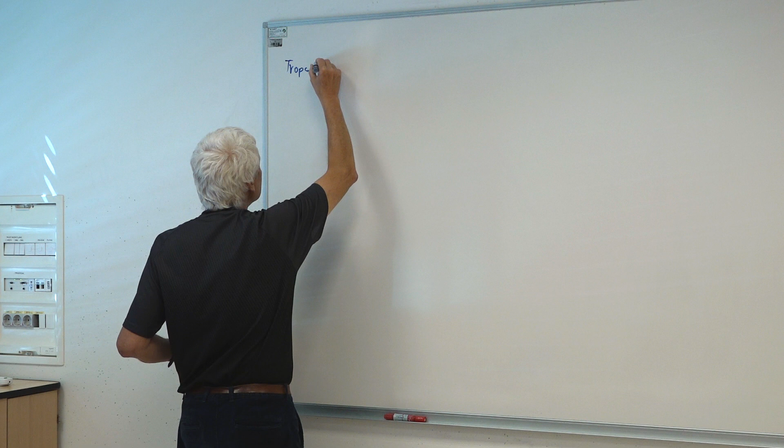Now it seems that climbing up in the atmosphere, the pressure is decreasing. Gases become very rarefied as you climb up. There are no clouds, no water vapor, no water drops beyond, say, 10 or 15 kilometers. In the stratosphere, there are no clouds. What happens as we go up?

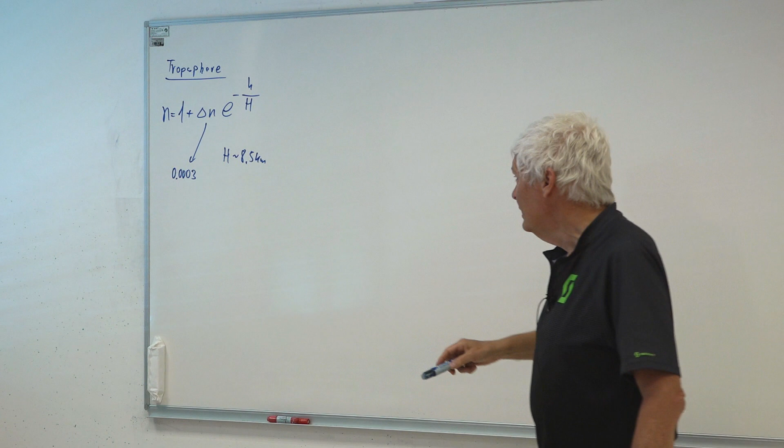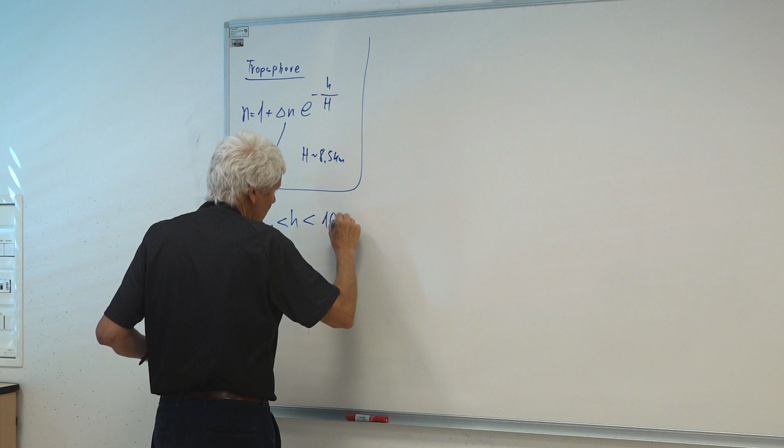Since there is no material, no gases, no water drops or ice crystals, there is no change of the refraction index. But what happens at altitudes above, say, 60 kilometers, and say less than approximately 1,000 kilometers, though there is no exact limit to this, we get into the ionosphere.

So particles here may be molecules, may be just single atoms, may be ionized atoms, having one electron more or less. They may also be free electrons in the ionosphere. So I may have charged particles here.

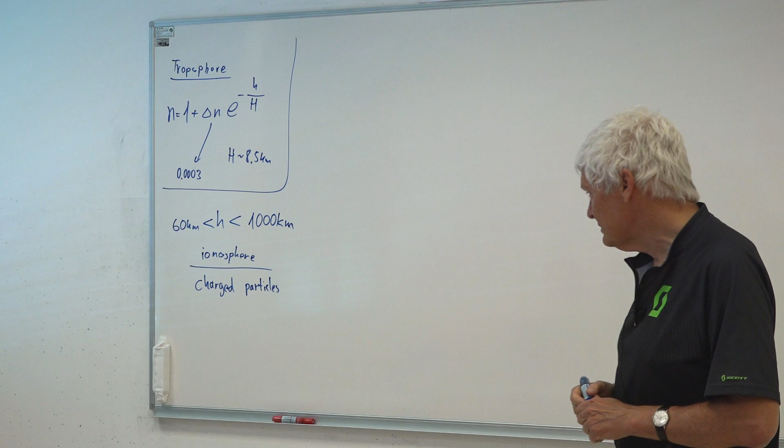And what happens with charged particles? If I have an electric field, these particles start moving. So if I have a particle that has a charge Q multiplied by the electric field, this gives me a force, a certain electrostatic force. And this force is now equal to the mass of the particle times the acceleration.

And this is equal to mass times acceleration, which is the derivative of v over time. Or written for harmonic fields, this is j omega for the derivation, mass times v.

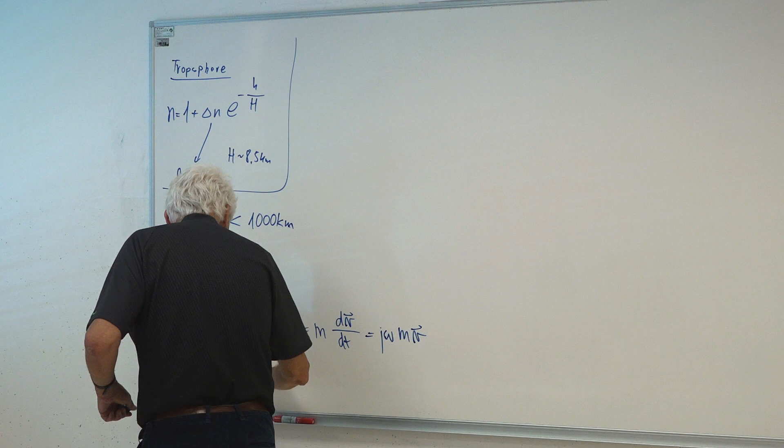This is now the velocity of our particle. I can derive the velocity of this particle out of the equations when I know the charge of the particle, I know the mass of the particle, and I know the electric field applied. So now the velocity v is equal to what? It's equal to charge over j omega mass, charge and mass being properties of the particle, times the electric field.

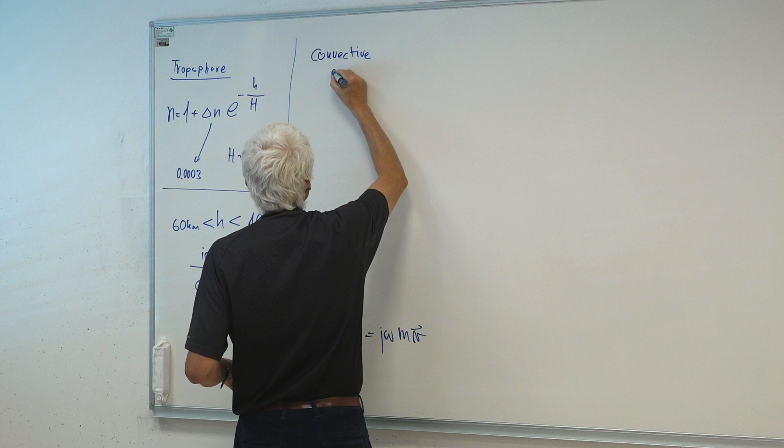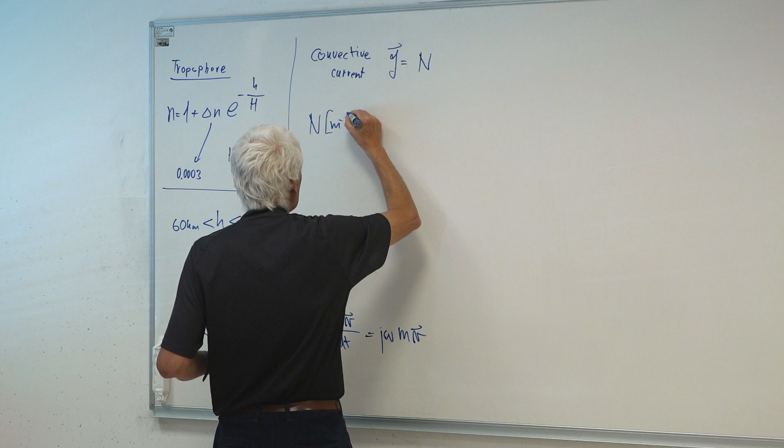So particles start moving. What do these particles do? They produce a convective current. And this convective current is equal to what? This convective current J is now equal to the density of the particles n, where n has units per cubic meter, times the charge of the single particle, times its velocity.

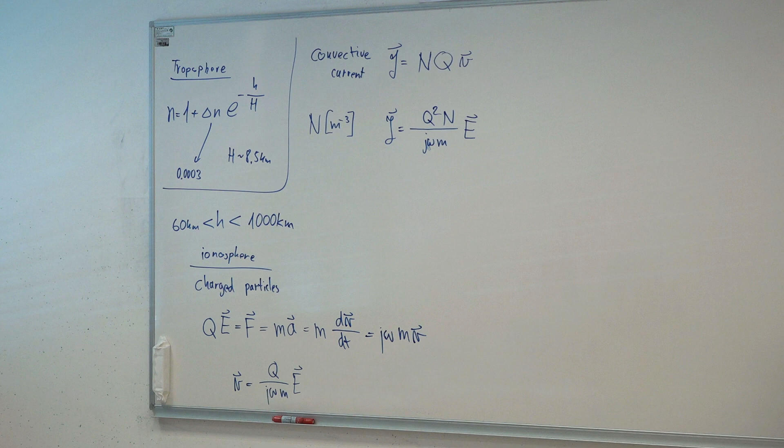So if I now combine the equations, plugging in this velocity of the particle, the convective current now is equal to Q, and Q is Q squared, N, over J omega mass, times electric field. So I have a current, the convective current, that is proportional to the electric field, with some constant here in the calculation.

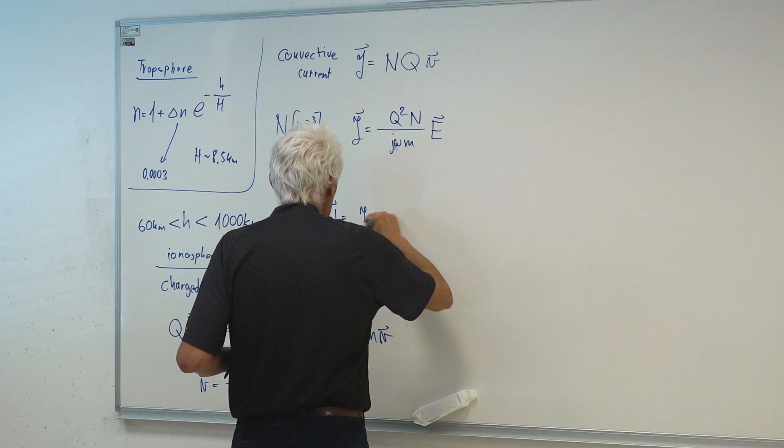So if I write the Ampere law, curl of H, or I can write curl with the cross product using nabla times H, this is now equal to what? What is this convective current? This is this one here, plus the displacement current, and the displacement current is J omega times epsilon 0 times E, since it's almost vacuum.

What is now the effect of this current? I can rewrite this thing once again, having both terms assembled. So let's write it as J omega epsilon 0 times... this counts for 1.

But since I miss here J omega epsilon 0, I have to add J omega epsilon in the denominator. So J times J gives a minus sign, and in the denominator now I have omega squared epsilon 0 mass. In the numerator I have Q squared N, and all this is times the electric field, the applied electric field. Let me check this again: J times J gives minus 1, omega epsilon 0, omega squared mass.

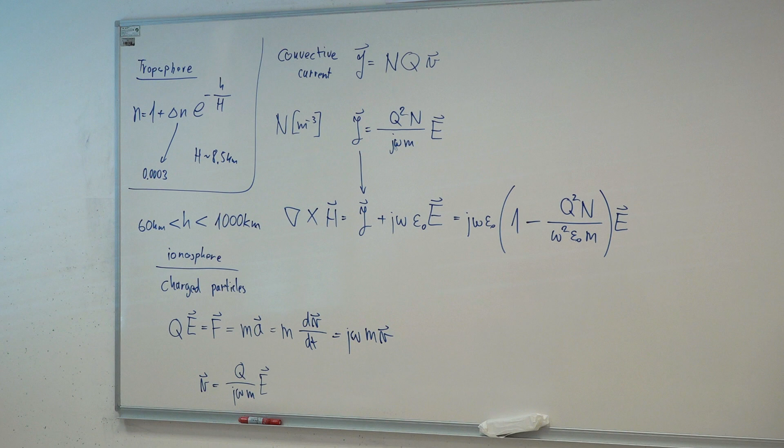So I can now say that the actual permittivity is different, that I have a relative permittivity, and the relative permittivity is this bracket here. So this is epsilon relative, the relative permittivity of space.

This is now the square... not yet, there will be a square root, but not yet, I was too fast. It is 1 minus Q squared, charge of the particle squared, density of the particles per cubic meter, frequency omega squared, epsilon 0, mass of the particle.

What is interesting here is that this relative permittivity is actually less than 1. Already this is interesting, but it actually does happen. It does happen that it's less than 1.

And also the refractive index of the ionosphere now is the square root of the relative permittivity, which is the square root of 1 minus Q squared N over omega squared epsilon 0 mass.

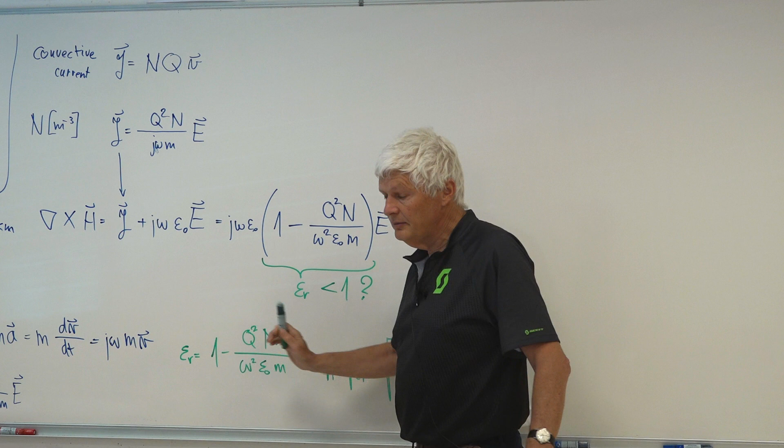Now you see that strange things may happen here. Epsilon relative, the relative permittivity, may get negative. It may happen negative at very low frequencies, where this fraction becomes large, and 1 minus something large may get negative. Also, the refraction index may get imaginary. An imaginary refraction index means no propagation.

So now it makes sense to actually simplify the quantities using this equation, because we are going to use them much in this hour. We want to simplify these quantities and find a new description for them. So I would rewrite this equation.

So 1 minus, for the relative permittivity, 1 minus q squared n over omega squared epsilon 0 mass. I would prefer to rewrite this as 1 minus plasma frequency squared over frequency squared, where the plasma frequency is the square root of q squared n over epsilon 0 mass.

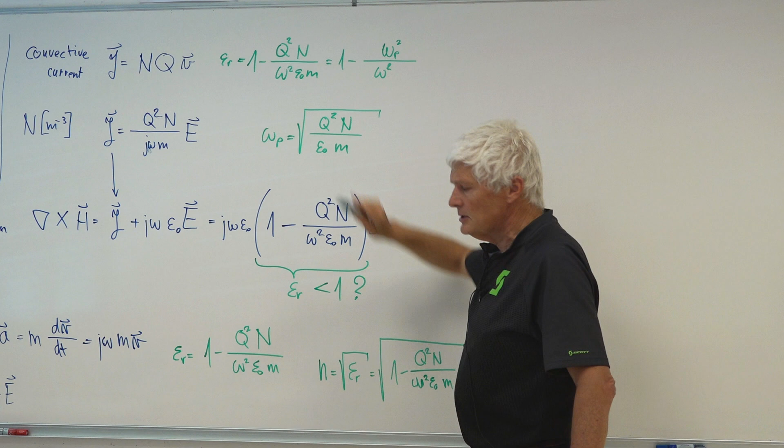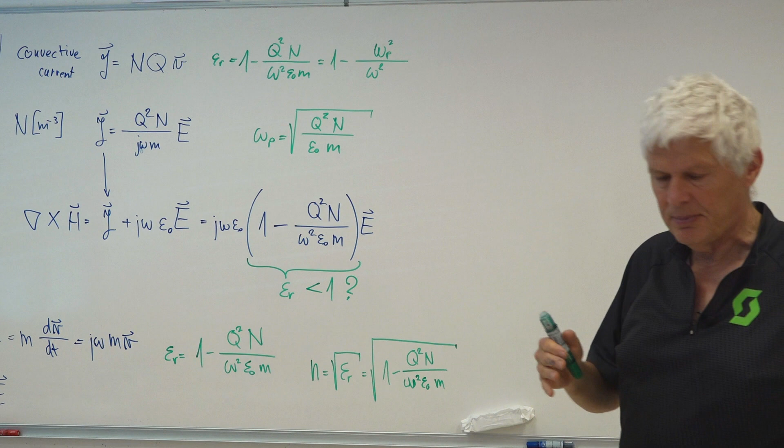But something I should point out here immediately: that electrons in the ionosphere, I also have free electrons. Free electrons have a very small mass compared to all other particles. Electrons are about 2,000 times lighter than protons, the next larger particle, the next heavier particle. So it makes sense to only consider electrons here.

So I have here the charge of an electron squared, the density of electrons, epsilon 0, and the mass of the electron here. Because the mass of the electron, as I said, is approximately the mass of the proton, the next heavier particle, divided by 2000. So electrons are much lighter than protons, so they are going to have far the largest contribution to the convective current, given by the electrons.

In fact, what I'm actually interested in, I'm not interested in the whole ionosphere, I'm interested in the so-called electronosphere. Just how many electrons do I have in the ionosphere?

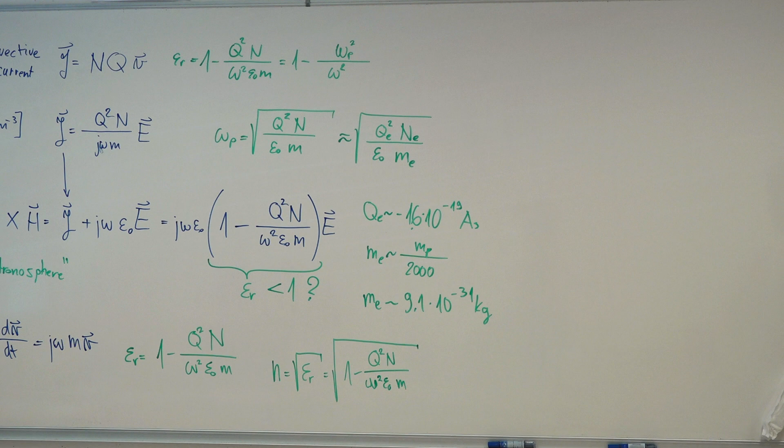And I know what the quantities are now. The mass of the electron is approximately 9.1 times 10 to the minus 31 kilograms, and the charge of an electron is minus 1.6 times 10 to the minus 19 amp seconds. This exact value here is also the definition of the ampere unit of measurement. So I know these figures, I know what epsilon 0 is. I only need to know the concentration of the electrons.

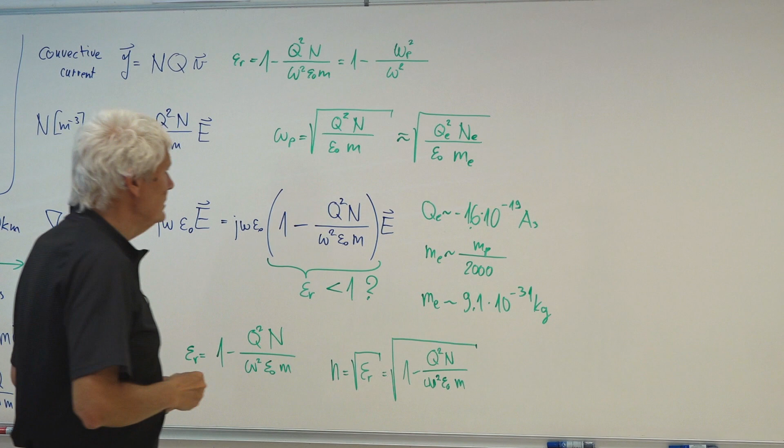How many electrons are out there in free space? To see where these effects take place, where does this omega p take place, I also use conventional frequencies. So frequently I write the plasma frequencies, I write this ratio with conventional frequency as 1 minus frequency, plasma frequency divided by frequency squared, where I just divide by 2 pi up and down.

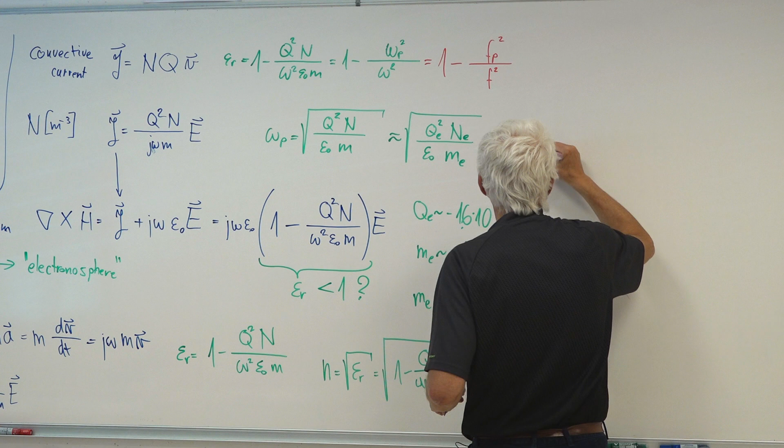So the plasma frequency is now approximately, for electrons only: I have 2 pi in front, 2 pi squared in the denominator, epsilon 0, mass of an electron; up I have q of an electron squared, concentration of electrons per cubic meter. How many free electrons per cubic meter do I have?

And the altitudes when this happens, and the densities of electrons are very small over there.

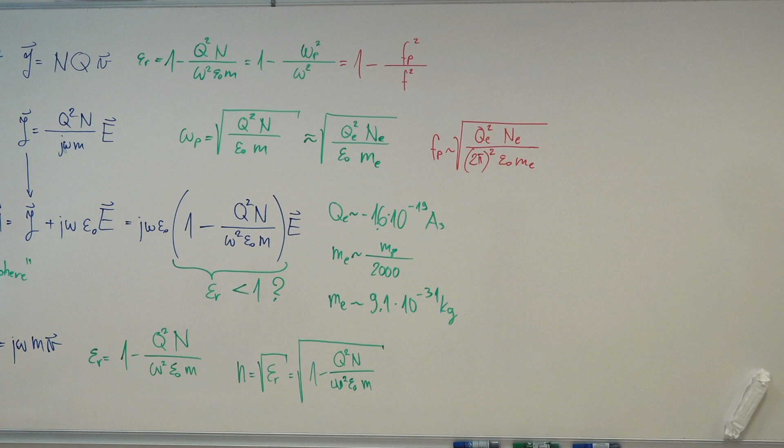So if I try to make a drawing: I start at 10 to the 9th power, 10 to the 10th power, 10 to the 11th power, 10 to the 12th power. This is concentration of electrons per cubic meter, meters to the minus 3. And if I draw here altitude: 100, 200, 300, 400, 500, 600. Altitude in kilometers.

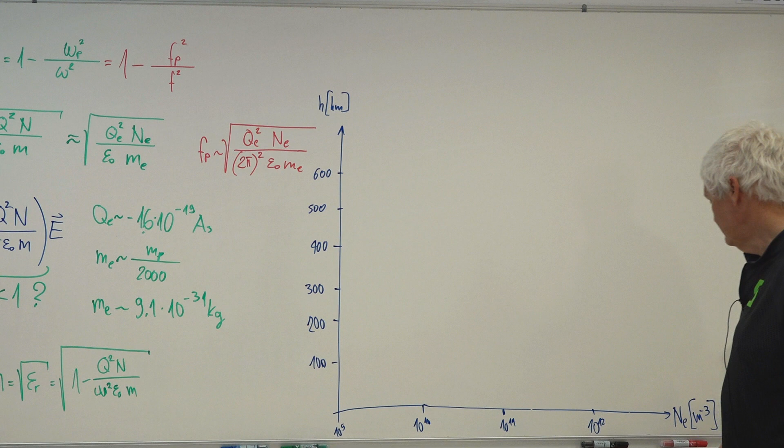Where do these things happen? Very little happens at low altitudes, because below 100 kilometers the air density is still significant. There are many collisions of these charged particles, and recombination of charged particles, plus and minus ions recombine. So I may have some very weak peak here, a much stronger peak here, but the strongest things happen up here during daylight.

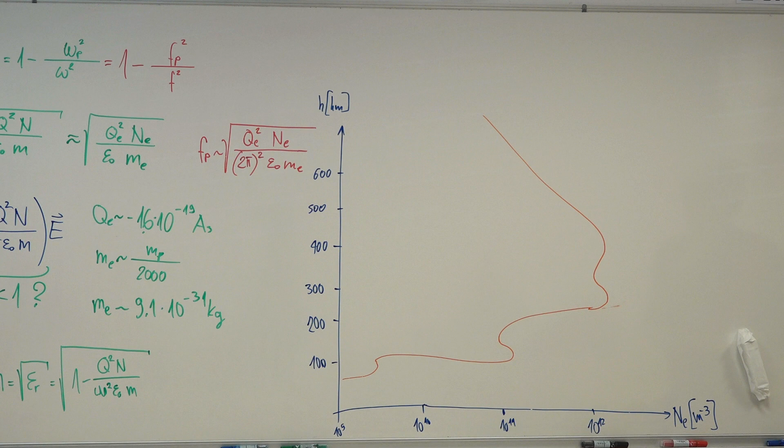These ionospheric layers, when physicists first described them: at perhaps 80 kilometers, layer D; at 120 kilometers, layer E. Then I have layer F1 at 250 kilometers, and another maximum at layer F2, around 400 kilometers.

What does this mean in practice? It means that the International Space Station is flying over here. So if I draw it, the International Space Station is flying at around 350 kilometers.

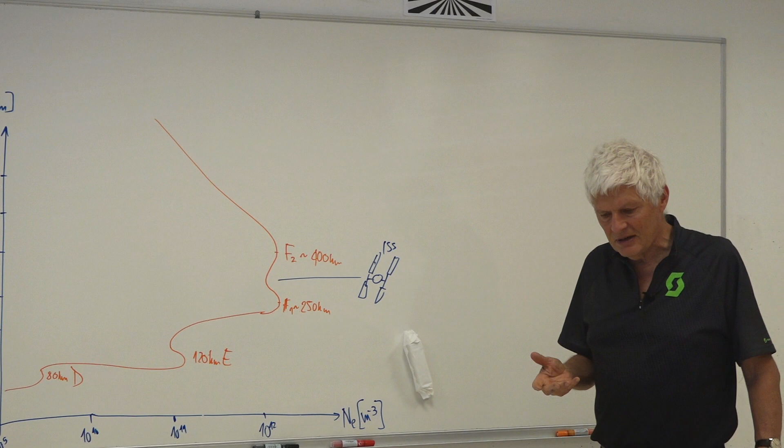For any practical reasons, these altitudes are, for us simple observers, complete vacuum. But they are not that good a vacuum. These 10 to the 12 electrons per cubic meter mean that the International Space Station is flying in an acid - though rarefied, this is an acid, a plasma made of electrons. Acids work in this way, forming free electrons.

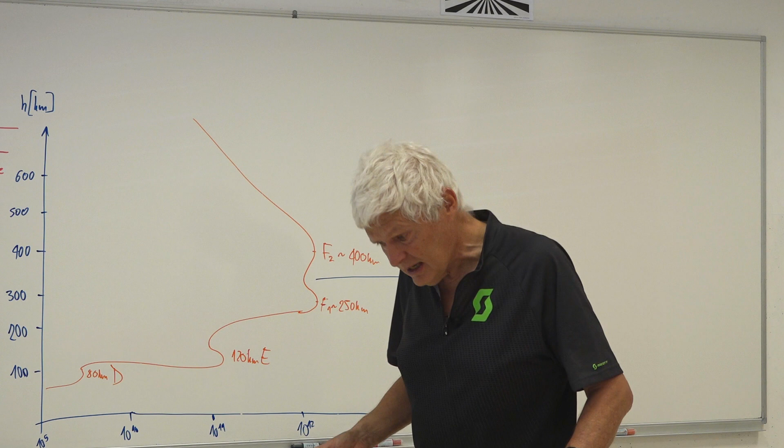And this is acid. You have to be very careful what kind of metals you build your space station from, so that it doesn't get eaten off by the acid it's flying in. Though this acid is very rarefied, observations on the space shuttle were that the nose, the tip flying into this acid, was actually eaten about 1 millimeter per week. This is an acid.

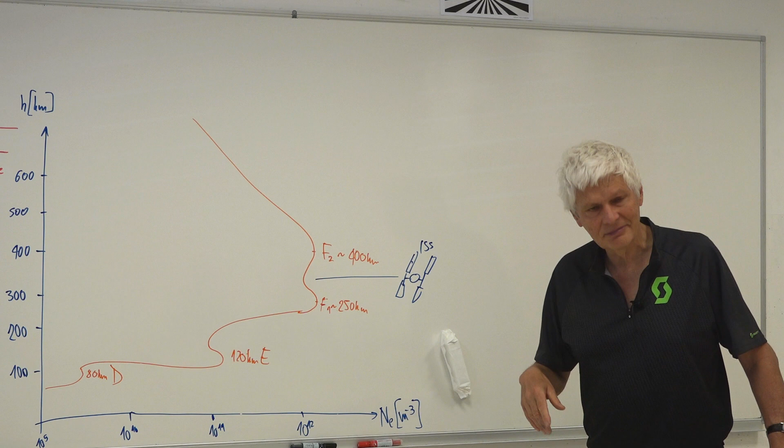It's not vacuum. Further, when we go further up in space, there is much less air available, so this is a very rarefied atmosphere. And this was during the day. During the night, things go a little bit different.

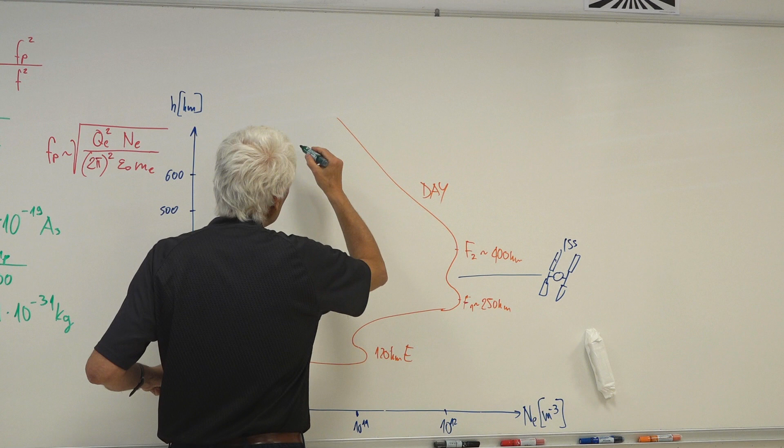During night, the maximum concentration is somewhere lower, and these lower layers disappear altogether. So lower layers at night are gone completely. And these two layers, F1 and F2, join in a single layer F at around 300 kilometers at night.

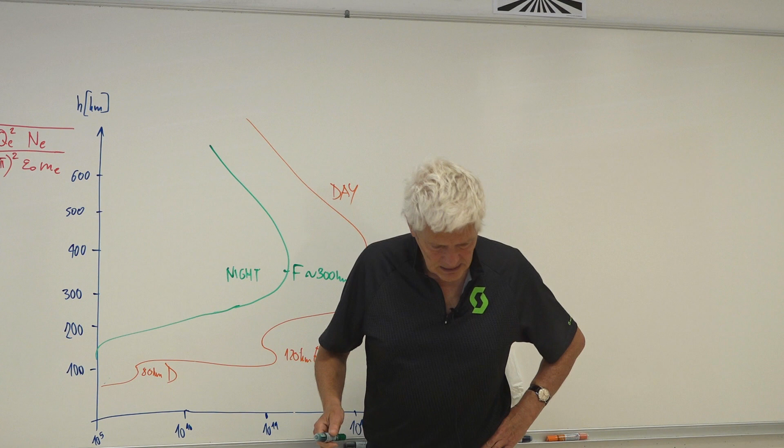Because all these layers are caused by short waves, say UV, X-ray radiation from the sun. At night when the sun is gone, we are in the Earth's shadow, but some electrons do stay here. Especially the recombination time of electrons in the higher layers is very long, because here the atmosphere is very rarefied. While lower layers, where you have lots of collisions with neutral particles and other ions, are gone completely at night.

So this is our actual situation of the ionosphere. What can we count now on this ionosphere? At night, the concentration of electrons in the F layer is about 10 times smaller than the concentration during day. So during day, we have a plasma frequency of, say, around 12 megahertz.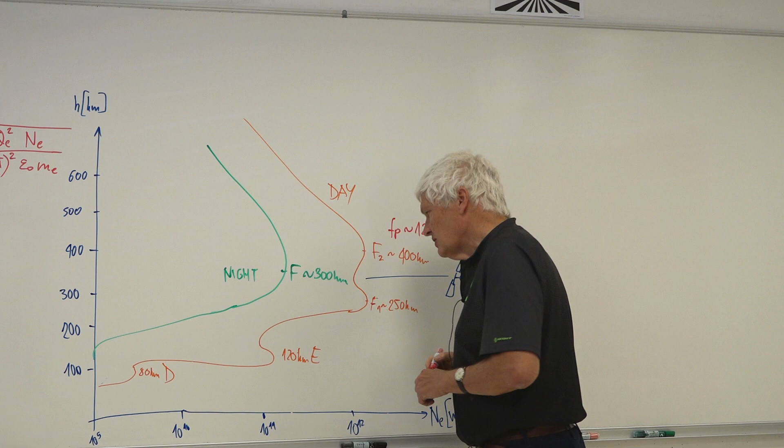But this changes very much with solar activity. Now it's very high, with the high solar activity and lots of solar flares we have right now. And since the concentration changes 10 times, the result during night is perhaps a maximum F plasma value of around 4 megahertz.

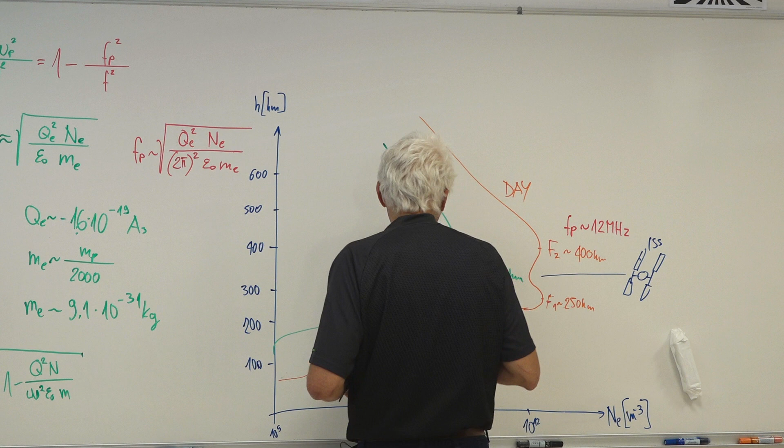Now we know the frequencies where we can expect some effect from the ionosphere. From the ionosphere in the higher layers, in the F layer or the two F layers, we mainly have refraction, because we actually change the refraction index here. We do have refraction in the higher layers.

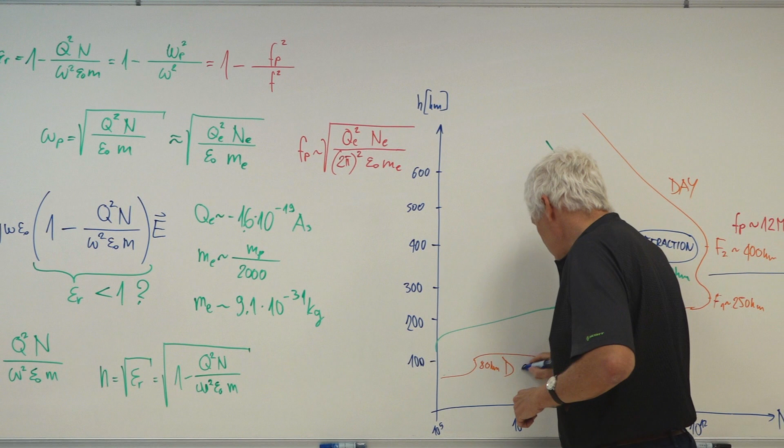While in the lower layers, we have collisions. When the particle collides with other particles, it transfers its momentum to them, therefore it loses energy - so here we have additional signal loss. These regions are lossy: low regions introduce loss, while high regions in the ionosphere introduce refraction.

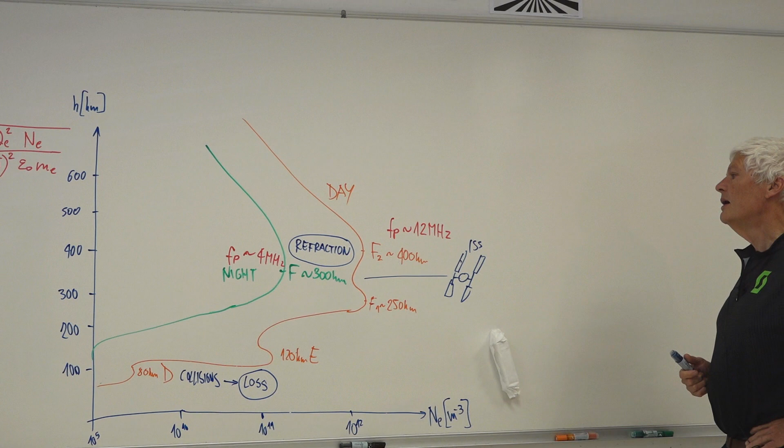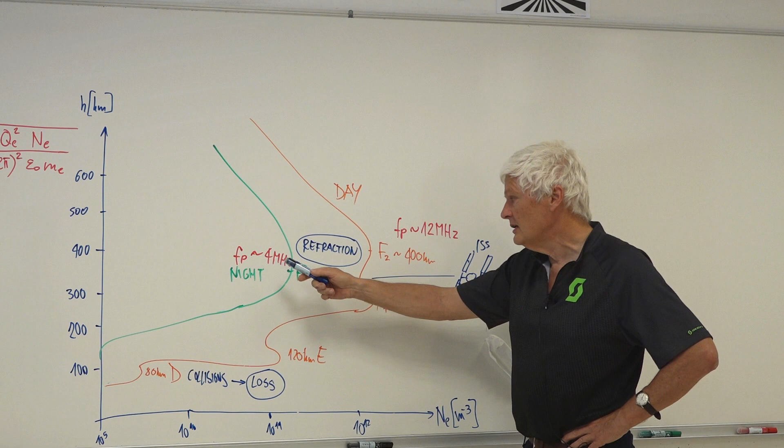So these frequencies are known - maybe 4 megahertz for normal solar activity, depending on whether the sun is behind it, generating all these charged particles. During day it's 12 megahertz, during night 4 megahertz. This figure may go quite up with an active sun with lots of solar flares, so it's not some fixed figure I can draw on the board - it's something that's changing all the time.

How can we use these things for radio communication? We usually don't like loss, signal attenuation - we don't like to talk about that, but even that plays a role.

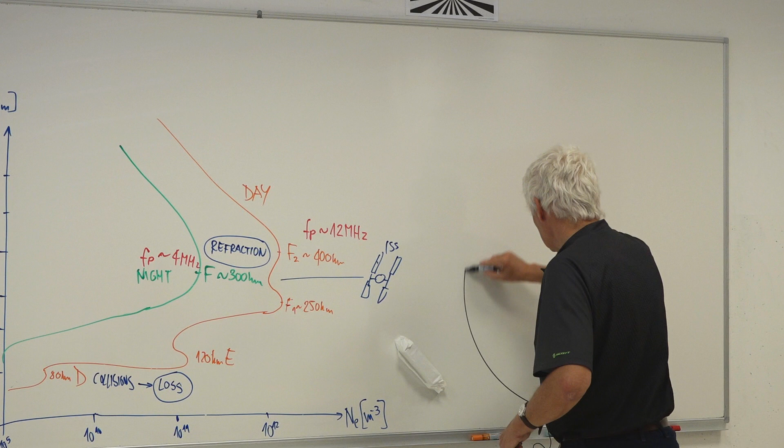We want to establish long-range radio contacts. Say we have our Earth here, and here is the center of the Earth - this is the radius of the Earth. And at a certain height, I have the ionosphere, say around 300 kilometers, just to give you an idea. And up here, I have the ionosphere.

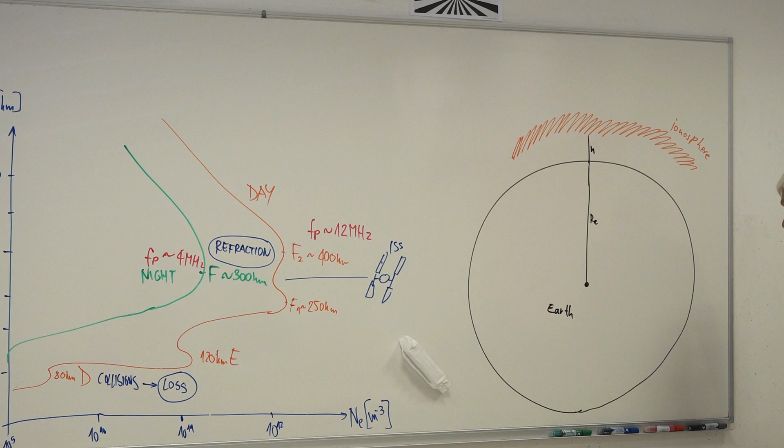The ionosphere does not have a strict limit where it changes. It goes all the way up into free space, but it's less dense at higher altitudes. So these lower altitudes are perhaps the most interesting for us.

So what I can think of is a radio link that originates from this station, goes straight to the ionosphere. There is almost no refraction here. Then in the ionosphere, I have refraction, and I can go back down to the ground to this station here.

So I transmit to the horizon, and also here I transmit to the horizon. This is the radius of the Earth, and this is also the radius of the Earth. What is now this distance covered? Distance here or distance here? They are identical. Here, in fact, with this refraction of the signal, I get total reflection.

I may get total reflection at some particular frequencies. What is now the geometry? How far can I get with this mechanism? Total reflection happens because the ray is bending back to the ground due to refraction, due to the changing refractive index of the ionosphere. What distance can I cover with this?

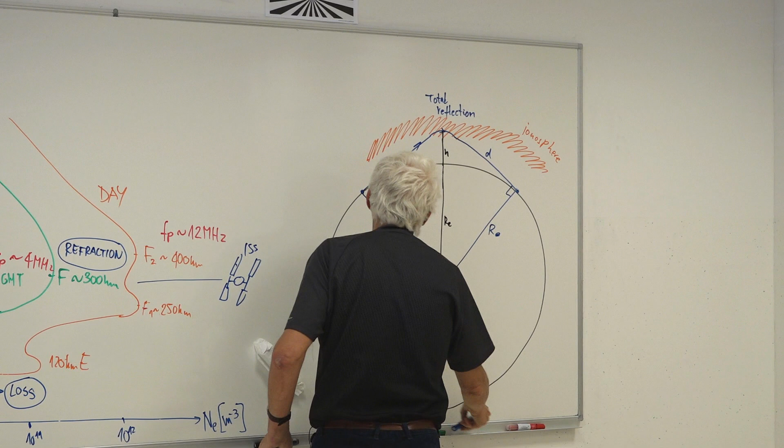So now, if I write down the equations of the triangle: r of the Earth plus h, squared, is equal, by the Pythagorean theorem, to d squared plus r of the Earth squared. But this term here is r of the Earth squared plus 2 times h times r of Earth plus h squared. So if I try to solve this equation, these two cancel out perfectly.

And just to simplify my life, I may neglect this term here. H squared is much smaller than twice h times r of the Earth, because h is in the range of 300 kilometers, and r of the Earth is 6,378 kilometers. So that term is quite small.

So my simplification now is that the distance covered in one hop over the ionosphere is the square root of 2 times h times the radius of the Earth.

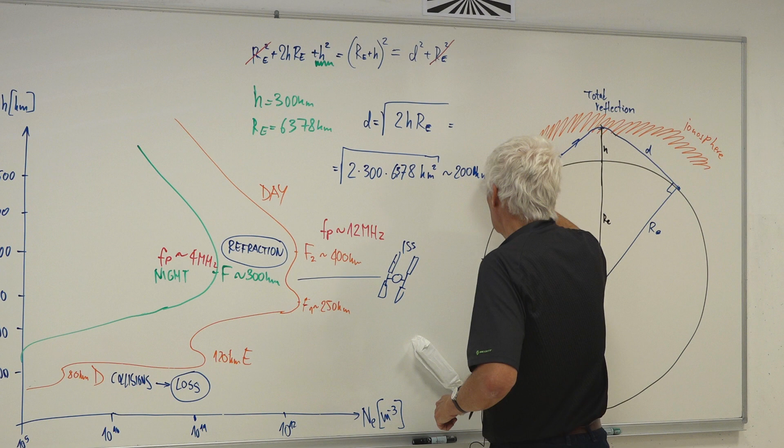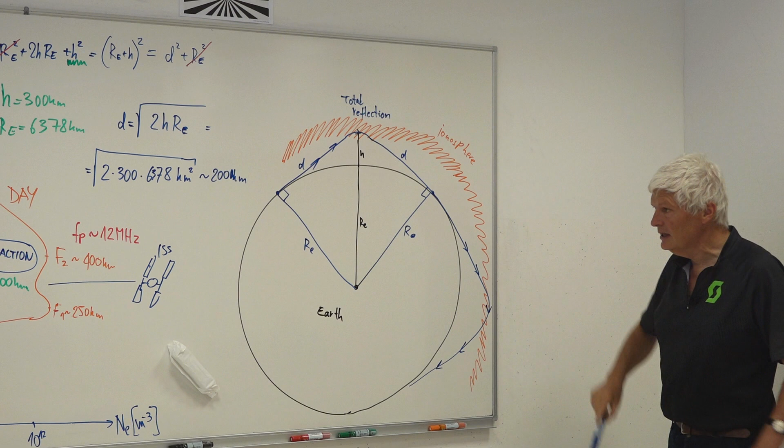So with 2,000 kilometers in one hop, I can make a journey of 4,000 kilometers. I may even have a reflection again off the surface of the Earth - one additional total reflection, refraction that turns into total reflection. So I have a reflection here, and then again total reflection here due to the refraction in the ionosphere. I can even get multiples of this distance, and practically reach the whole Earth if the ionosphere is in the correct condition to support this operation.

Up to which frequency can I go here? It depends on what n I need here - what the minimum n is required to support this operation.

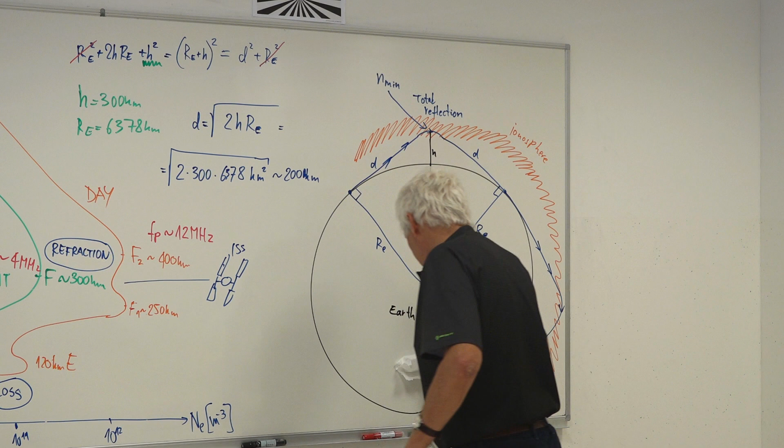And I can draw here the law of refraction, as if I had just total reflection on a simple boundary. So if I draw this, I have n over 1, and a ray coming in here. I want to have it horizontal, so here I have theta, and here I have pi over 2.

If I now rewrite the law of refraction, sine of the incident theta is equal to n. So I can calculate what n I need from sine theta. Where is theta? Theta is this angle here on this picture, so I see which quantities I have. I need sine theta - sine theta is now r of the Earth, this side here, divided by this side here, r of the Earth plus h.

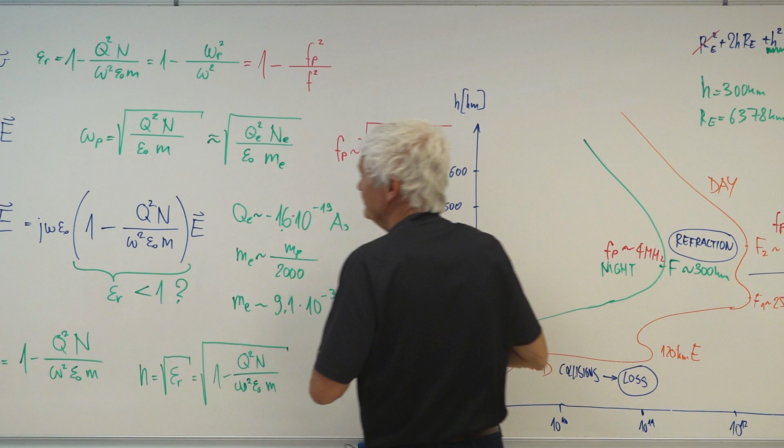This is the refractive index I can get here. I can get this refractive index only up to a particular frequency - beyond that frequency, I can no longer get it. So let me rewrite this now: refractive index. I should make some space on the board because I don't have any more space here.

So we were left here: our refractive index is now r of the Earth over r of the Earth plus h. And this is equal, on the other side, to the square root of 1 minus f plasma squared over f squared, frequency squared.

Now let's try to solve this equation. So I have to make a square. R Earth squared, R Earth plus h squared, is equal to 1 minus f plasma squared over f squared. If I pull this one to this side and revert the signs, I have r Earth plus h squared minus r Earth squared, divided by r Earth plus h squared, is equal to f plasma squared over f squared. On this side, simplifying on the other side, r Earth cancels out, so it's 2 times h times r Earth plus h squared divided by r Earth plus h squared.

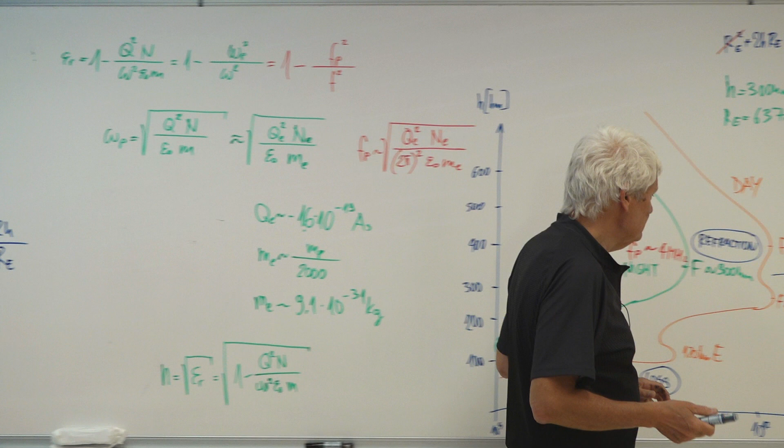So I can get up to frequencies, perhaps, here during the day, the maximum usable frequency may be in the range of 40 megahertz. Up to 40 megahertz I should be able to establish such connections as given here. It's not particularly high, and this should be during daylight. Also during night these things go lower, about 3 times lower. During night, the maximum usable frequency is perhaps just 13 megahertz. So it changes a lot from day to night.

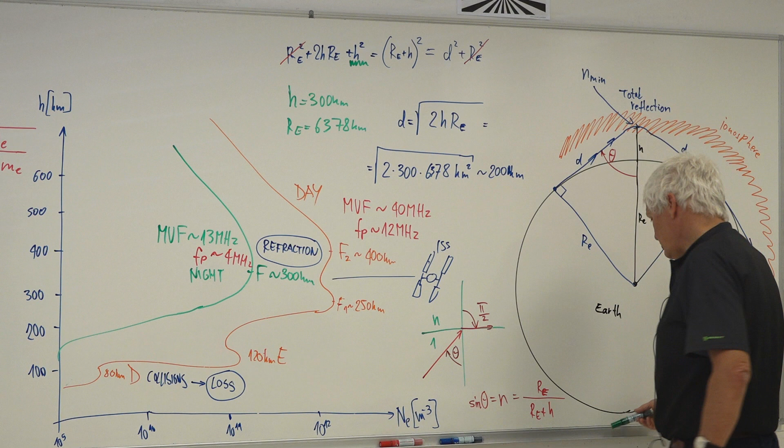Further, I should not forget that on the light side of the Earth, I also have the intermediate D and E layers, while this other layer was the F layer of the ionosphere, or both F layers up here. What does that mean? It means that I have loss here, and I have loss up here — signal loss due to attenuation. We didn't derive this today, but the attenuation in the ionosphere is inversely proportional to the frequency.

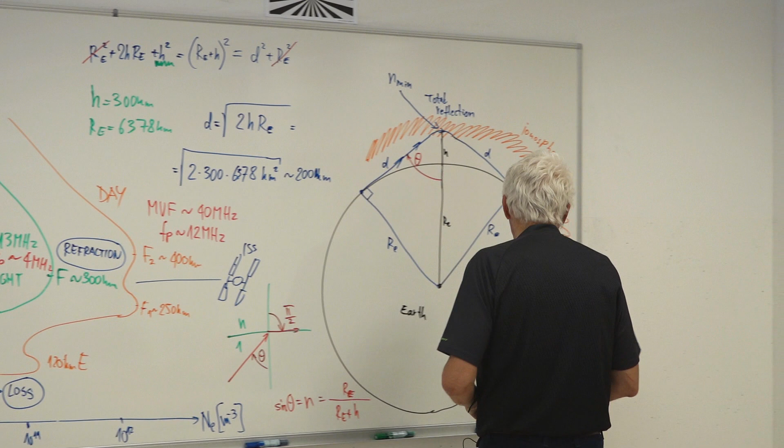We don't have time to do that derivation today. So what does that mean? This attenuation, this loss here, gives us a lowest usable frequency, due to attenuation during daylight, if the sun was shining from this side here. This was night, in the shade of the Earth. The sun coming from here illuminates this part, generating new electrons in the D and E layers all the time. This attenuation adds loss. LUF is not a fixed figure — MUF is a fixed figure. MUF depends exactly on the geometry, so the altitude of the ionospheric layer and its plasma frequency.

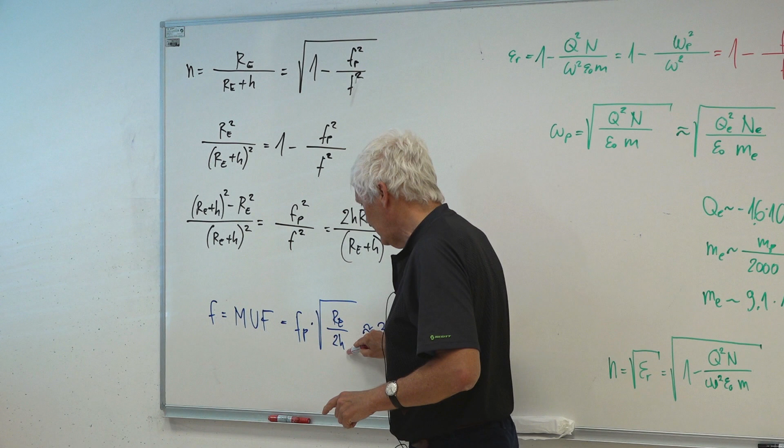While LUF, the lowest usable frequency, is also a function of our transmitter power. If I have a high transmitter power, I can overcome this loss. So what happens during daylight? Here during daylight, the LUF is maybe in the range of 7 megahertz, depending on how you define it.

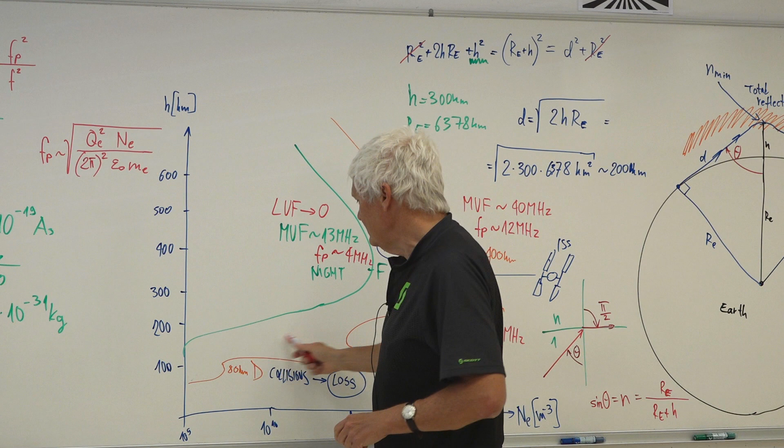The lowest usable frequency goes to 0 during night. During night, these low layers with high amounts of neutral atoms that cause collisions disappear, so I have no such attenuation at night. The lowest usable frequency here goes to 0.

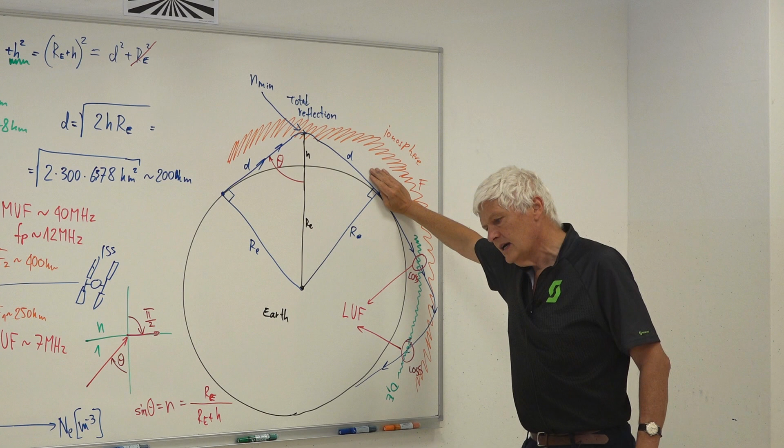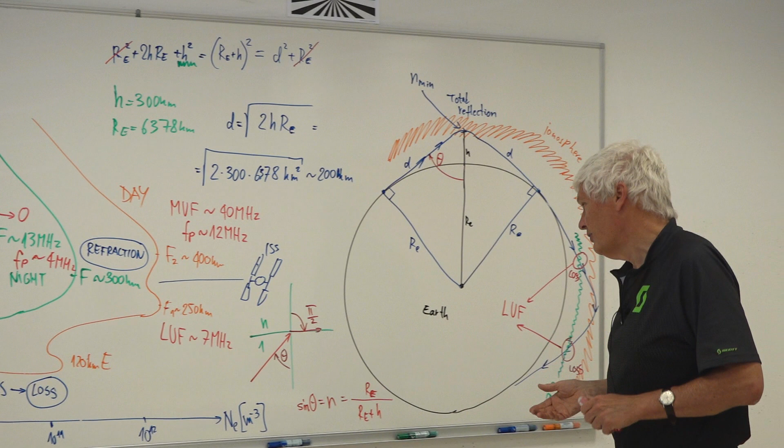So it's frequent that if I am using these effects in the ionosphere, I have to change the frequencies of my radios during day and night. If you have a radio broadcast on HF, during the day broadcast stations use higher frequencies, and during night they use lower frequencies. Not just HF, high frequencies, but also medium frequencies, medium waves during night, and even long waves, even 100 kilohertz, because this LUF goes down almost to 0 during night, at least for what is useful for radio waves. So this is in short terms what happens with radio waves.

I should also explain a detail I may have forgotten. If the frequency is higher than the plasma frequency, I have a dielectric with a relative epsilon. If the frequency is less than the plasma frequency, I have a negative value under the square root, and I get an imaginary n. That means this is a conductor with some conductivity gamma. So I only have a dielectric in the ionosphere when the frequency is high enough, above the plasma frequency; below the plasma frequency, I have conduction.

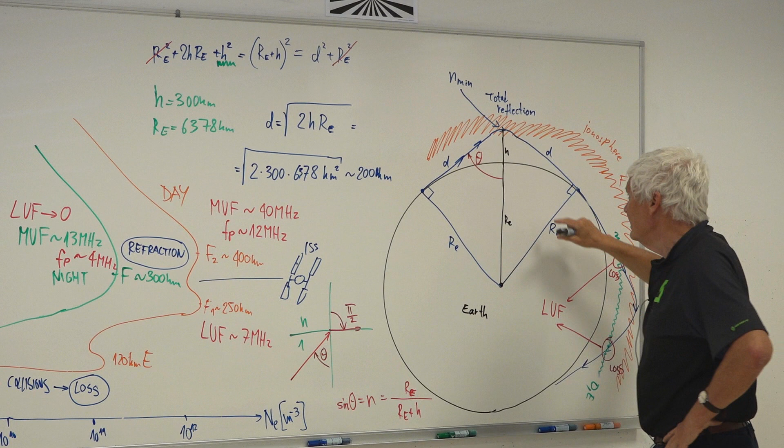But before I get to this conduction, keep in mind this is not an exactly defined layer. The concentration of electrons slowly grows and then falls back again. So if I have a conductor here, I may have a dielectric here, or I have a conductor here and a dielectric here. So before I reach the conduction inside, I could also have reflection like a conductor — I could achieve this result.

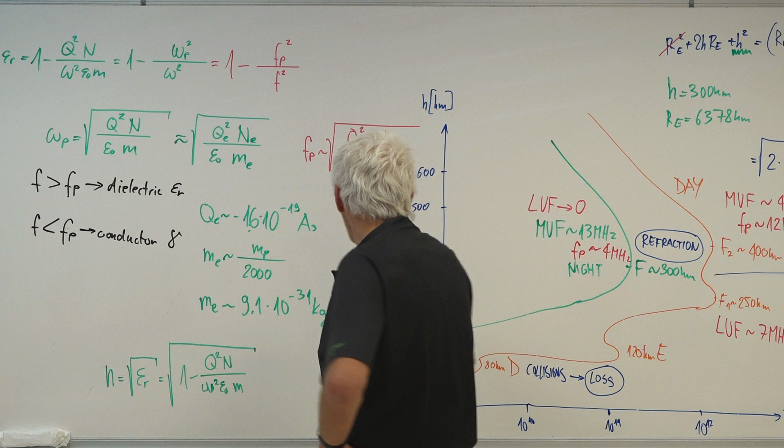If I transmit vertically, I have no refraction in the ionosphere — I may have back reflection down to the ground when I am below the plasma frequency. But usually in radio contacts this does not count for much; mainly I have refraction before I get to the conductive layer inside the ionosphere.

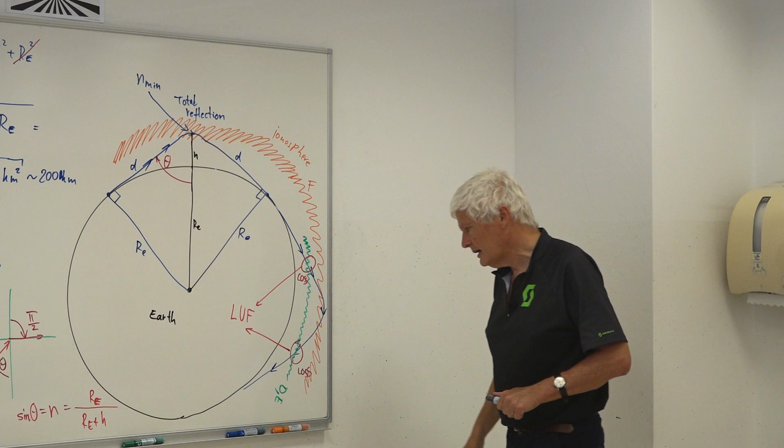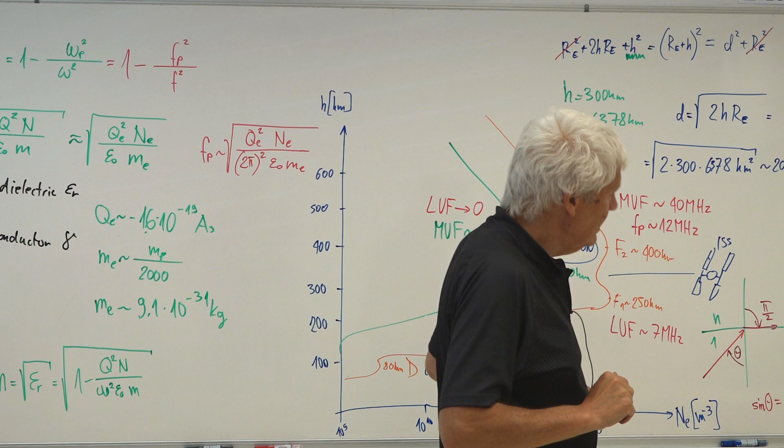Something I could further tell about the ionosphere: it seems from these equations that the ionosphere is useless above 40 megahertz. Maybe on particularly active days, when this thing goes to 100 or 200 megahertz, that may happen rarely. It does not happen anything at higher frequencies... actually yes, it does happen. There is a small variation of the refractive index even at higher frequencies.

Say for GPS that works at a frequency of 1.5 gigahertz, I do have a very small effect. The epsilon is quite close to 1, but it is not equal to 1. I still have a small refraction, and this small refraction yields errors of approximately up to 100 meters during the day, while at night I have no such errors due to the ionosphere.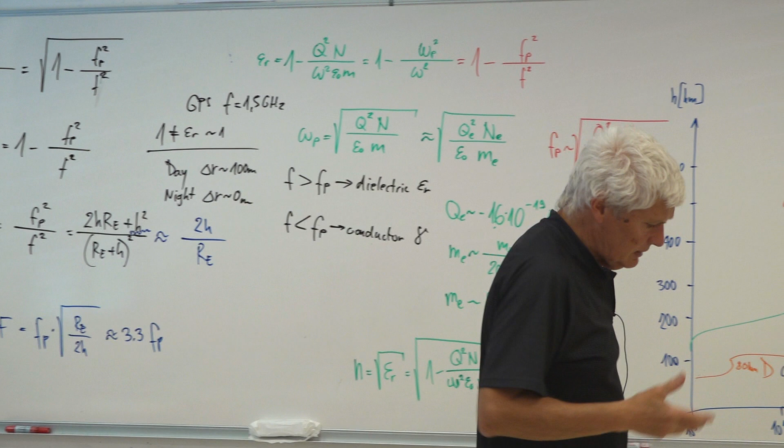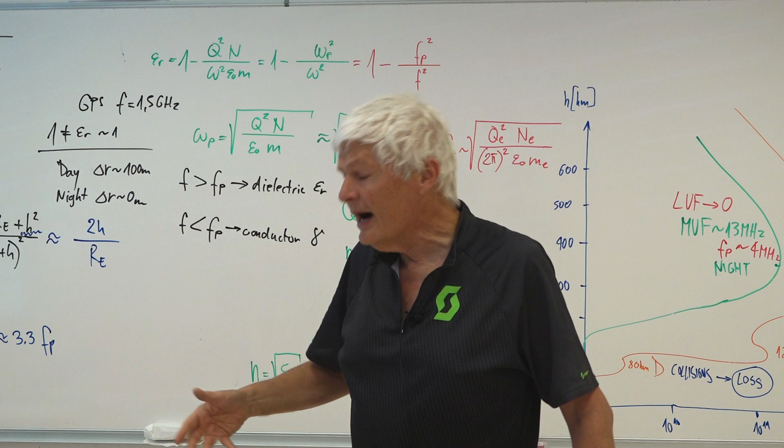I have special means to compensate for these errors in GPS. But even GPS working in the gigahertz range, these small changes in the refractive index, they do change it. It's approximately 1, but not exactly equal to 1. So it changes the distance measured, and since the distance is 20,000 kilometers to a GPS satellite, that small difference makes quite large mistakes here.

One final word about the ionosphere: we could talk the whole year just about it. The ionosphere is a very complex matter, and I only have 1 hour left here.

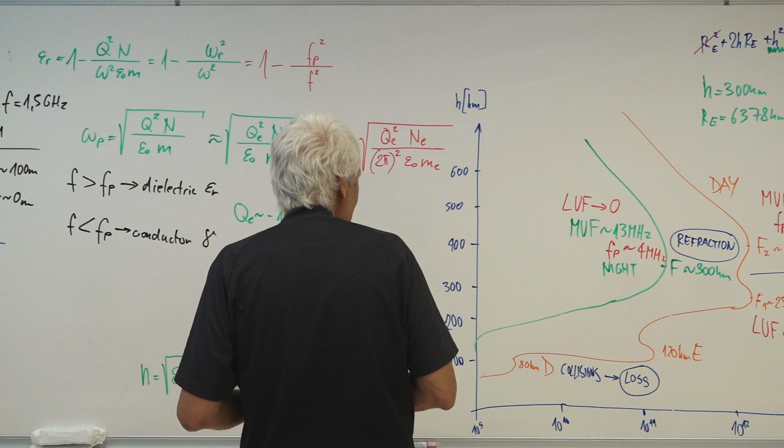In the Earth, I have some magnetic field. B0 of the Earth, or H0, is around 40 amps per meter. What does this Earth magnetic field cause? It causes electrons to circle this field, following a circular or helical path around the field lines.

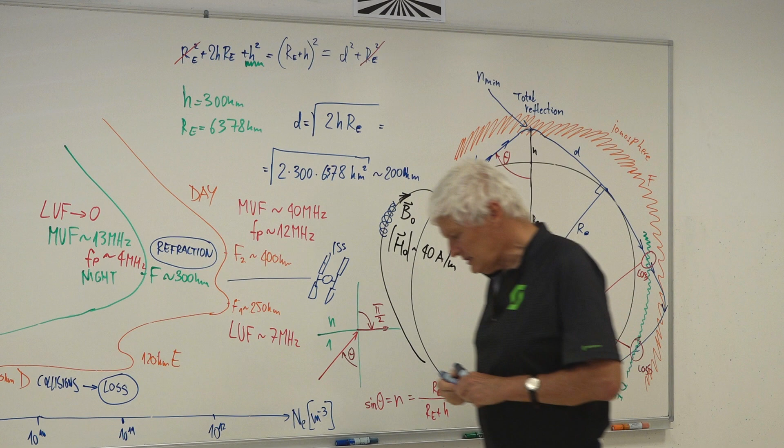What is this frequency? This omega of gyromagnetic resonance, omega g, is proportional to the charge of the particle, proportional to the size of the magnetic field, and of the opposite sign. It's inversely proportional to the mass, so the charge and mass of electrons are involved. The gyro resonance frequency is omega gyromagnetic divided by 2 pi. In the Earth's atmosphere, plugging in this number, this is around 1.4 megahertz.

These things have many effects. It causes birefringence even for GPS, and even unreciprocal behavior, so this is Faraday rotation. It also causes additional loss, and this loss increases very much at these gyromagnetic resonant frequencies.

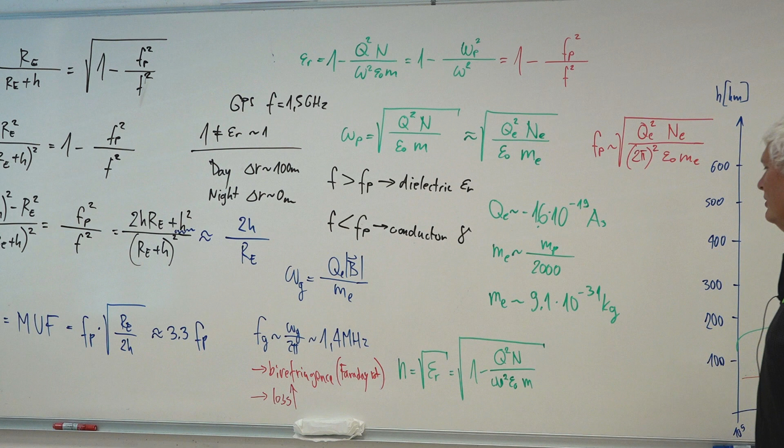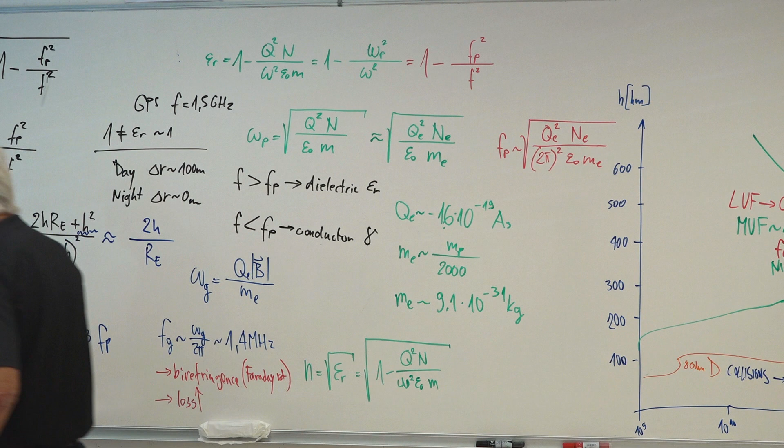What is the background of all this? Now it's no longer being used, but 1.4 megahertz many years ago was a radio broadcast frequency band. The whole medium wave broadcast is in the frequency range 540 kilohertz to 1605 kilohertz. We have this gyromagnetic resonance in this frequency range, causing much increased loss here. So medium waves at night, at the lowest frequencies, span very large distances.

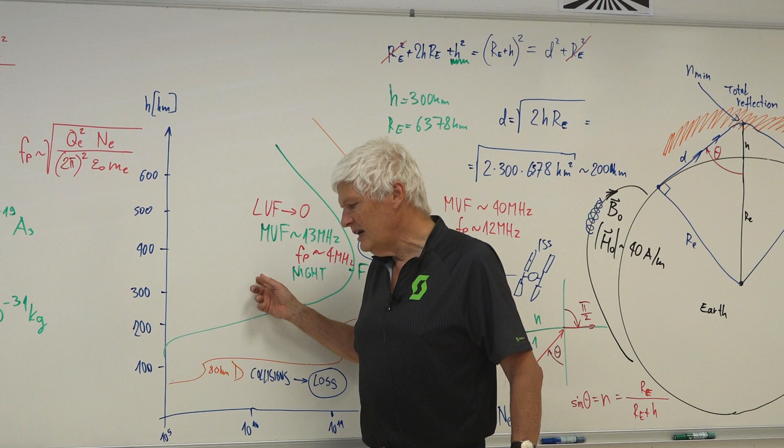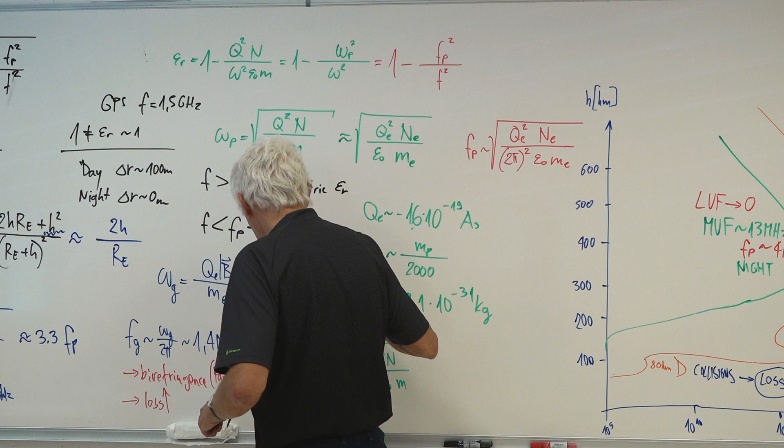If you have one of these old receivers, maybe a vacuum tube receiver from your grandmother or grandfather, you can turn it on at night and it becomes alive. It hears stations from all over the world, but not at all frequencies, not around 1.4 megahertz. That's the reason, because of this loss, that 1.4 megahertz was used for local transmitters, because they had no range - this gyromagnetic resonance happens also at night, always there, making trouble. It was used for local transmitters, and what is left of that is the name.

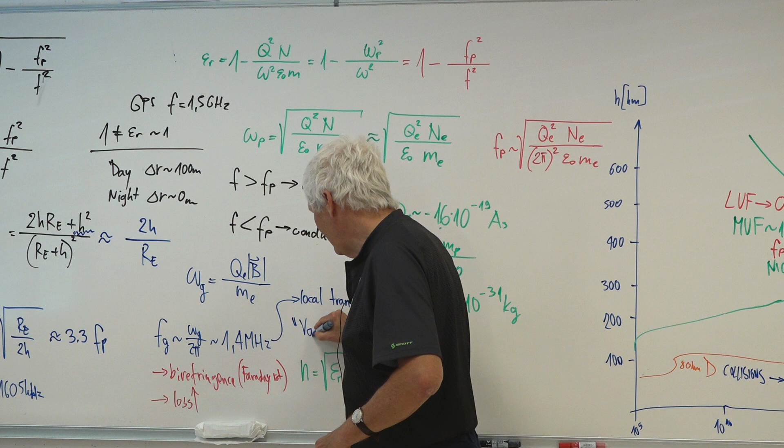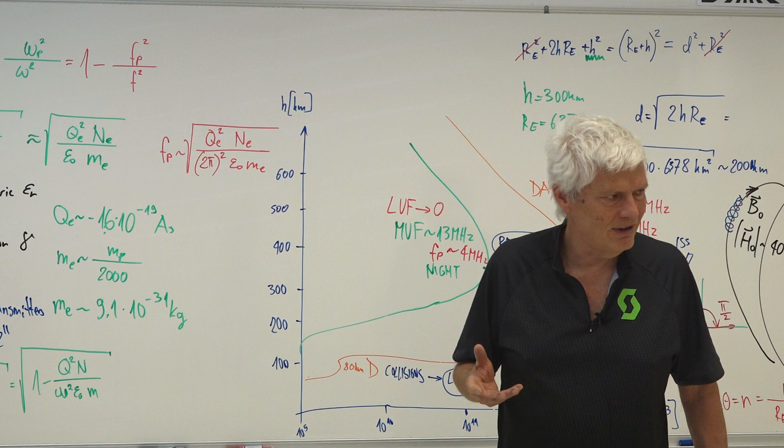The name is left, like Val 202. This was 202 meters, which is 1.4 megahertz. Local transmitters used these frequencies because they were not intended for international broadcasts thousands of kilometers away. The name is still used today, though most people do not know what Val 202 really means - it means 202 meters of wavelength. That's the reason local transmitters were built on these frequencies, with just local coverage without using the ionosphere, because of the very high loss from gyromagnetic resonance in the ionosphere. This is just for fun, what I'm telling you.

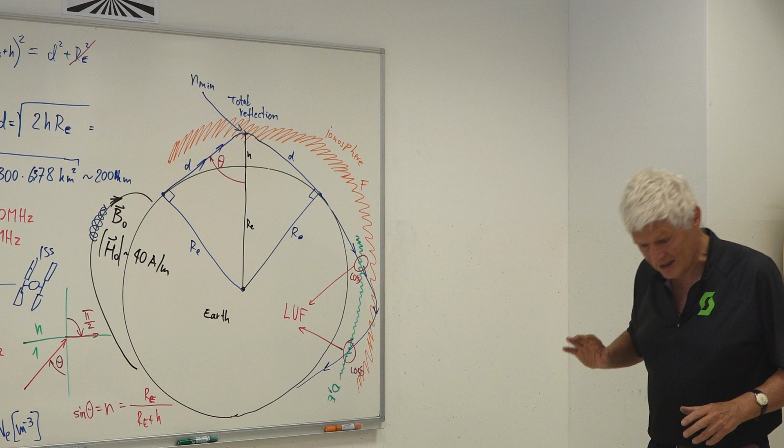Next time we are going to see other effects on radio waves. We can calculate everything in radio waves, but things are changing - the ionosphere is changing, thunderstorms are changing, many things are changing. We have to look at fading and the statistics of signal fading in radio links, starting with the ionosphere, since it was first observed there because of changing solar activity and changing day and night. We will have to see how to handle these things mathematically next time. That's all for today.